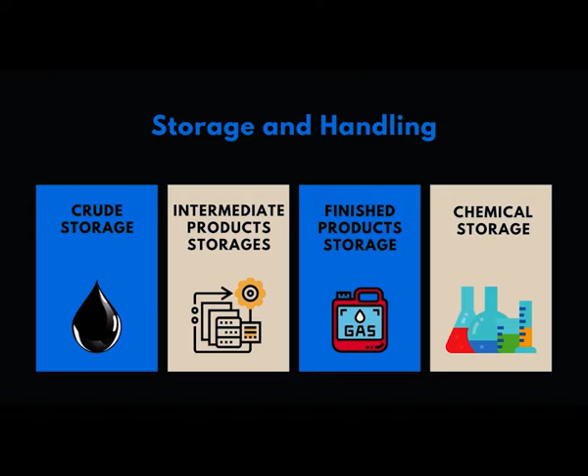Whenever product is received in the storage tanks, the level will go up. Always the hydrocarbon vapor will be on the top of the liquid surface, and these hydrocarbon vapors go out, and then air will come in during the pumping in and pumping out operations. So, during the entire process, there is a small quantity of hydrocarbon going out as evaporation loss. This kind of tank is primarily meant for non-volatile products known as finished lube oil or fuel oil, primarily heavy oils. So, if I use a cone roof or fixed roof tank for a lighter hydrocarbon, there is always a possibility of the vapors going out continuously and there is a huge evaporation loss.

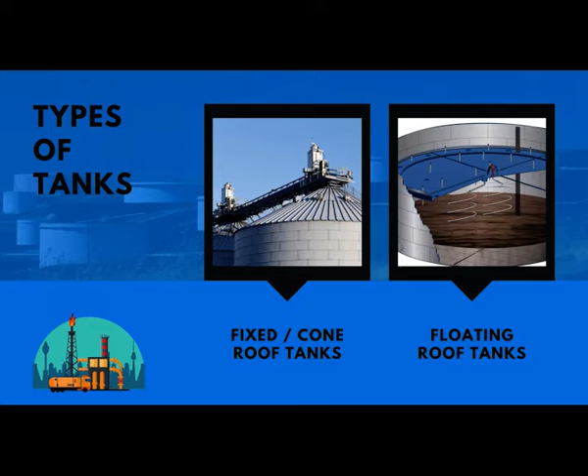In order to address the evaporation loss, designers have come out with another type of tank known as floating roof tank. In the floating roof tank, the roof is floating on the surface of the liquid and it is not tightly fixed or welded with the tank shell. So, the roof can float up whenever the liquid level goes up, and the roof can come down whenever the liquid level comes down. So, this way there is no gap between the roof surface and the liquid surface, and this is how evaporation is minimized.

So, floating roof tanks are primarily used for storing naphtha, heavy naphtha, kerosene, aviation turbine fuel, diesel, etc. These kind of light products which are evaporative in nature can be stored in floating roof tank.

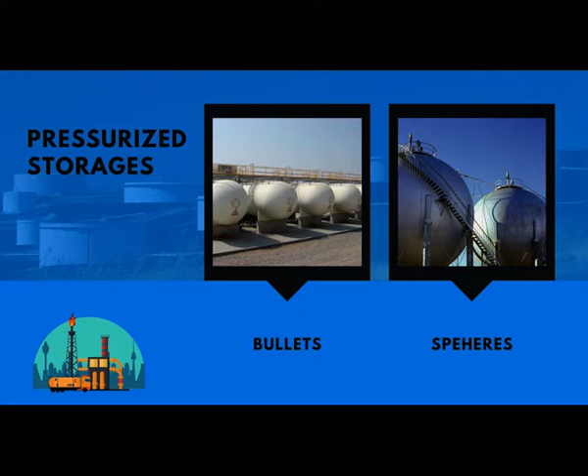Then we have other types of storage which are known as pressurized storages. For example, if you take LPG as a product from refinery, LPG is actually a gas, it is liquefied, and it is liquefied under pressure. So, if I have to store this LPG, I cannot store it in a normal tank, I have to store it in a pressurized container. That is where we try to use a bullet or a sphere. A bullet is almost like a capsule kind of structure, whereas a sphere is spherical in shape. Because of the geometry of this kind of tank, it can withstand pressure from all directions. So, these are all a little costly to construct and maintain, but we have no other option to store products like LPG, butylene, propylene kind of products.

Then what are the different kinds of activities that happen in a tank in a refinery? For example, if you take crude oil, the crude oil can be received in the tank, so the receipt is one kind of activity. Suppose if it is an intermediate storage tank, the intermediate products are received from the processing unit, or a tank can be meant for finished products, the finished products are received. So receipt is one function.

Then certain tanks, we have to remove water. If it is a product, water cannot be taken to market, so the water needs to be settled down and then drained. If it is a crude tank, again water needs to be settled down and then drained, because water cannot be pumped into the distillation unit. So water removal or preparation of the tank is another activity.

Then the third set of activity that can happen in a tank is blending. For example, you may have a diesel which would be a mixture of raw diesel, kerosene and heavy naphtha. All this can happen through a pipeline. If it is happening in a pipeline, then it is known as pipeline blending. If it is happening in a tank, it is tank blending. So blending can be another activity.

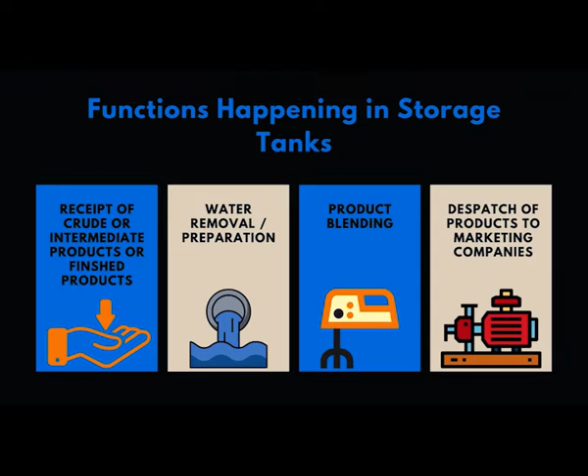Now let's try to understand power and utilities. Power and utilities will be a separate department in a refinery. Of course, it is part of operations, but it is not part of the manufacturing block.

Under utilities, we have water treatment plant, steam generation, cooling water system, process water system, service water system, power generation, instrument air system, plant air system, inert gas or nitrogen system, and finally fuel system. These are all the different kinds of utilities provided in a refinery.

Primarily, utility is nothing but an essential commodity or essential system without which the refinery cannot function. So it is imperative that we need to know more about the offsite and utility, because they are vital for running a refinery without any interruption.

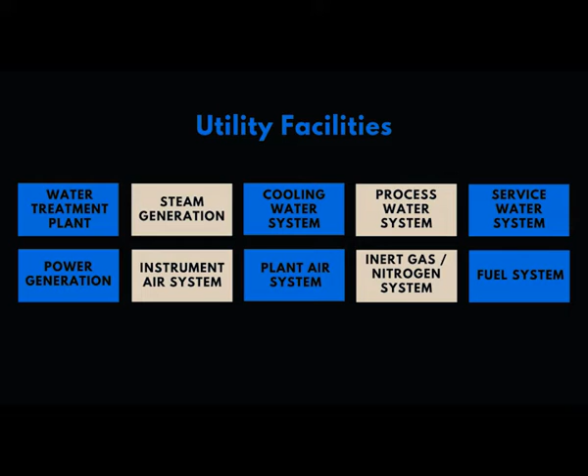Water treatment plant: water is an essential commodity to run a refinery. The sources for the water would be either groundwater, river water, or sea water, or city sewage water, or a combination of all this.

Here the water needs to be sampled and analyzed for its hardness content or softness content, and it has to be analyzed for all other composition. Based on that, the treatment will be decided.

The treatment plant will be designed upfront based on the raw water quality. Primarily here we try to soften the water, because hard water will form scaling inside the refinery equipment. It has to be softened, and it has to be deaerated.

All the dissolved gases from the water need to be removed. It can be either oxygen or carbon dioxide. Then finally you have to remove all the minerals.

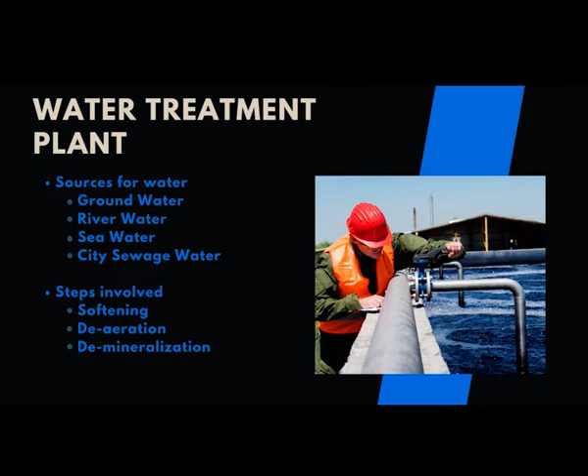This is very much essential to produce steam in a boiler. In order to produce steam in a boiler, we have to have demineralized water. So removing the minerals using ion exchange is one step in the water treatment plant. This is an essential step in refinery utilities.

Then steam generation. Why do we need steam? Steam is meant for multiple purposes. One is, even in process in a refinery, like the steam reformer, you need the process steam. The process steam will be part of your process.

So here are the steam and hydrocarbons in a reformer. They undergo chemical reaction, and finally hydrogen is produced.

Then steam is also used in steam turbines to produce power. Sometimes steam is also used as a turbine for driving different kinds of pumps.

What are the steps involved at a high level? The heating of the demineralized water happens in the boiler coil by burning fuel oil or fuel gas, and the steam is generated, and then segregated into different stages. For example, based on pressure, the steam can be categorized into high pressure steam, medium pressure steam, or low pressure steam.

The next one is known as the cooling water system. In one of the previous episodes we discussed how crude oil is preheated before getting into the furnace. So crude oil is preheated with the help of hot products.

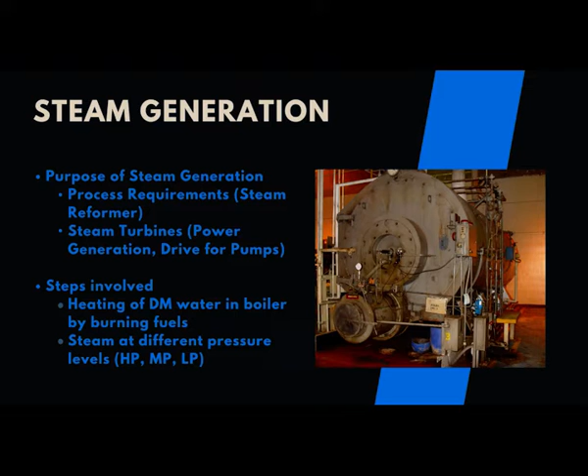So this is the kind of heat exchange happening. Apart from these heat exchangers, finally there will also be product coolers. The product coolers will ensure that the products reach ambient temperature before they are sent into storage.

How are these products getting cooled? They are cooled in a water cooled exchanger. So what would happen to the temperature of the cooling water? The temperature of the cooling water will go up.

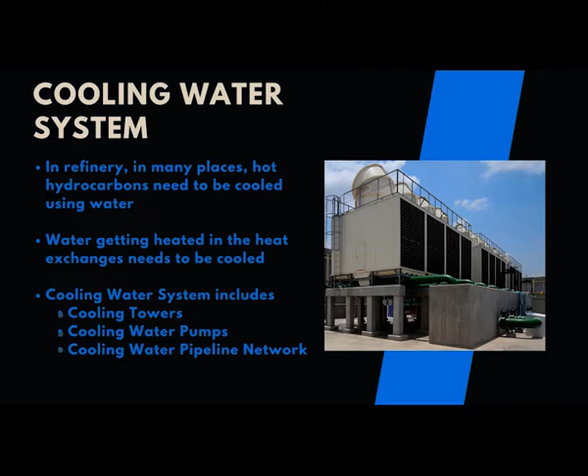So the hot cooling water coming back to the power and utilities department now has to be cooled. The quantum of cooling water coming back to the cooling section will be enormous. So in order to cool that, we have a huge arrangement known as the cooling water system.

In many places, hydrocarbons need to be cooled using water, and the water getting heated in the heat exchangers needs to be cooled, and this is happening in the cooling tower or cooling water system.

So the cooling water system primarily consists of a cooling tower, and it can have multiple towers based on the load and throughput. Then we have huge water pumps which will pump the cooling water to the entire refinery, to all the coolers, and then again they will come back to the system through the cooling water pipeline network. So all this will be part of the cooling water system.

Then we have process water. There are places where water needs to be injected at different stages of petroleum refining.

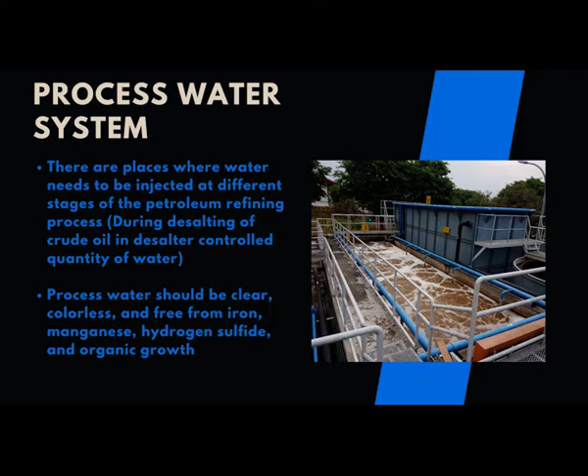Before admitting crude oil into the atmospheric distillation column, salt present in the crude oil needs to be removed. A controlled quantity of water is added and sent to a vessel known as a desalter, where the water is allowed to settle down. For admitting such water into the process system, we need process water, which should be clear, colorless, and free from iron, manganese, hydrogen sulfide, and other organic growth causing substances. That is known as the process water system.

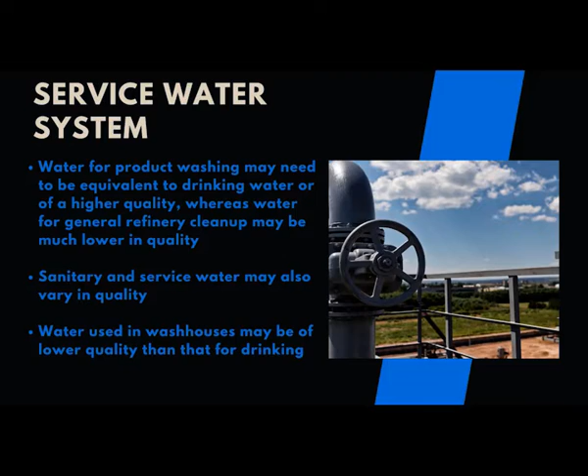Then we have another type of water system known as service water system. Inside a refinery, a lot of maintenance activities happen, and during that process the entire flooring gets spilled with oil and water, which need to be washed. For all washing purposes we need service water. Water for product washing may need to be equivalent to drinking water or higher quality, whereas water for general refinery cleanup may be much lower in quality. It is primarily meant for service purposes, cleaning and housekeeping activities. Sanitary and service water may also vary in quality - water used in washhouses may be of lower quality than for drinking purposes, which is known as potable water.

Power generation is an important activity in a refinery, because there are lot of rotating equipments that may require electrical power supply. Since a refinery is a continuous process unit which runs 24/7, 365 days a year, almost for 3 to 4 years until turnaround maintenance, the power supply needs to be very reliable. So refineries generally do not rely on external power supply. In order to have a reliable system, they have a captive power generation unit inside the refinery.

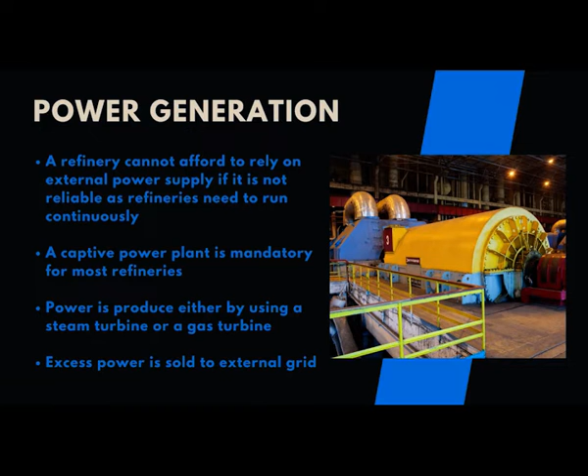We mentioned the need for a steam generation facility. With the help of the steam generated, we can run a turbine, and with the help of the turbine we can produce power. A refinery cannot afford to rely on external power supply if it is not reliable, as refineries need to run continuously. A captive power plant is mandatory for most refineries. Power is produced either by running a steam turbine or a gas turbine. Excess power, if generated, can be sold to the external grid. Normally the refinery floats with the external grid, meaning they will be selling power, but in case of an emergency they can start consuming power from the grid.

Then instrument air system. In a refinery you have a lot of instrumentation, ranging from sensors, dial gauges, etc. But finally all these instruments are meant for regulating the flow of some process stream, fuel or steam, etc. To regulate this process stream you need a control valve, and to regulate the control valve we need an instrument air system. So though all instruments are operated by electronic signal, the final control elements, the control valves, generally operate by pneumatic air. To supply pneumatic air to the control valve, we need a centralized facility known as the instrument air system.

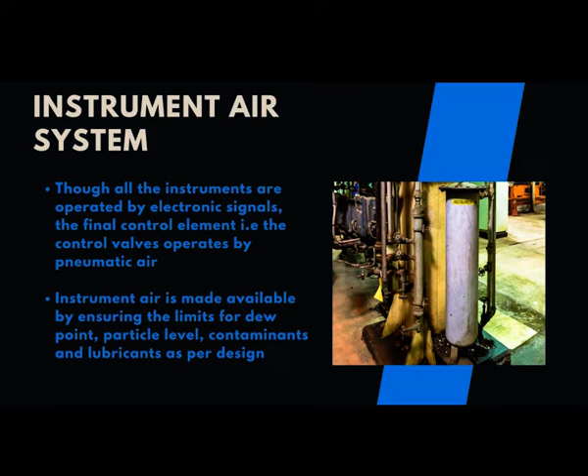The instrument air is made available by ensuring the limits for dew point, particle level, contaminants and lubricants as per design. This instrument air is generated and then sent throughout the refinery in the instrument air network, and this network should be maintained with proper pressure.

Then we have the plant air system. In the previous episode we mentioned bitumen air blowing, where we need air as a process stream. That is why we have a compressed air system, or plant air system. There are certain plants in a refinery where air is used as a process stream, and this air shall be void of moisture and any other impurities, because it is directly mixing along with the hydrocarbons.

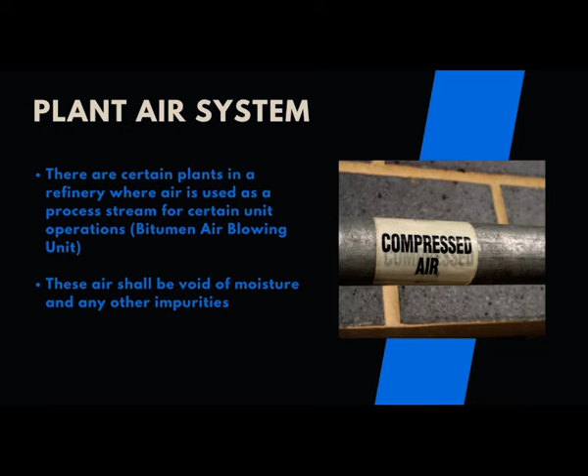Then we have the inert gas system. The purpose of the inert gas system is to test every segment of the refinery before startup. After a turnaround maintenance, a refinery has to be started at that point. When we start pressurizing the entire system, there should not be any pressure leak, and the hydrocarbon should not come out and create a safety hazard. In order to take care of these issues, we test the entire system with the help of inert gas. In a refinery, nitrogen is primarily used as the inert gas.

Nitrogen as inert gas may be needed for pressure testing of vessels and the system in the refinery. It is also used during startup of process plants, and nitrogen is produced by splitting air into oxygen and nitrogen, either by pressure swing absorption or cryogenic methods.

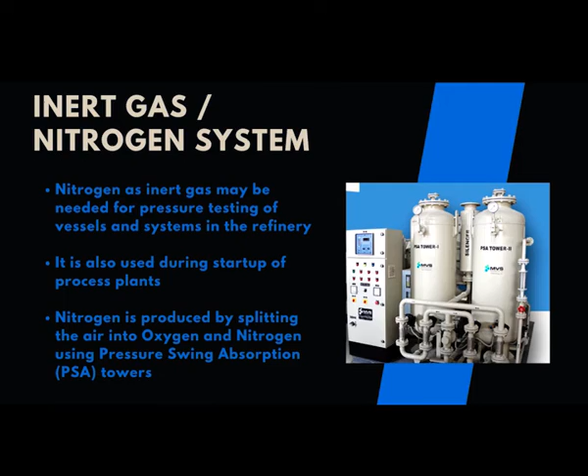Then we have the fuel system. There are many process heaters or furnaces inside a refinery, starting from heating crude oil. There are multiple segments of the units where the temperature of the process stream needs to be increased.

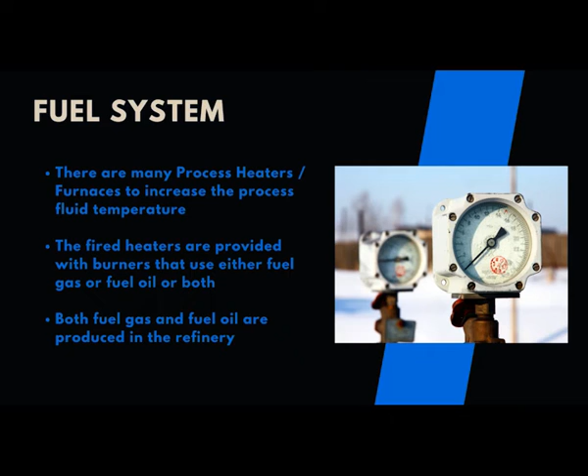This can be done by burning fuel gas or fuel oil, which are already produced in the refinery, but we need a system to regulate their flow, pressure, etc. Fuel gas comes through a fuel gas header. Similarly, fuel oil has a supply header as well as a return header. If fuel oil is not congealed, the line should not get choked, which is why we have a fuel oil return header going back to the fuel oil storage tank, so there is continuous movement and no possibility of the line getting choked.

Then we have certain systems which are very much essential from the point of view of health, safety and environment. One such system is the flare system, then the fire water system, then the effluent water system. Let's quickly try to understand all three systems.

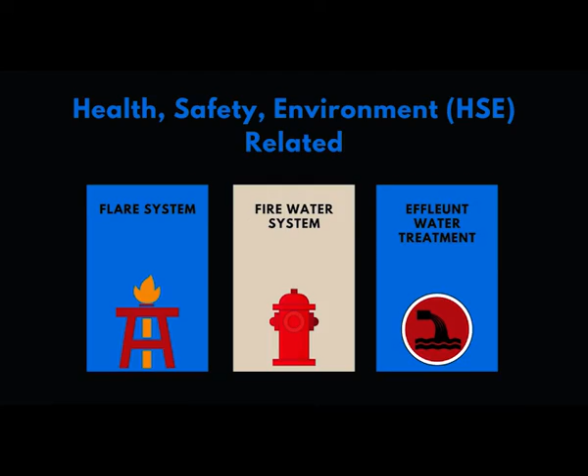In every refinery, from a distance you will be able to find out the presence of a refinery, or even sometimes whether the refinery is running or not. When a refinery is alive, it can be significantly seen with the help of a flame in the flare stack. A flare stack is nothing but a tall tower above which waste gases from the units are burnt safely. If they are not burnt safely, the hydrocarbon will settle down at ground level and create a potential safety hazard. So in order to avoid this, these gases are burnt.

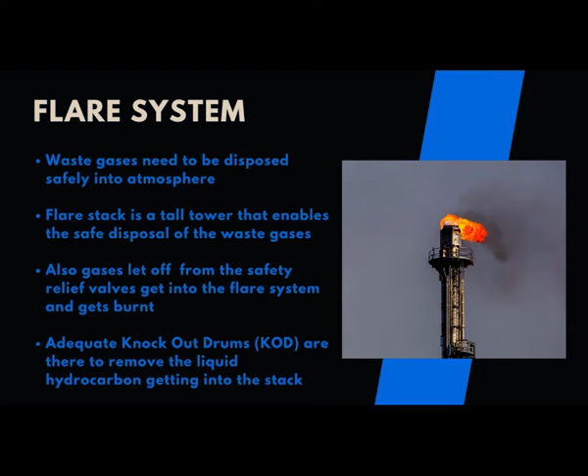Today we have a lot of sophisticated systems to compress the flare gas and recover energy from it, known as a flare gas recovery system. But there will still be a lot of uncontrolled gases coming out of the refinery. These are all collected, and any liquid hydrocarbons present are settled and separated, and finally the gases alone are burnt on top of the flare stack.

Then we have the fire water system. Even in commercial buildings you would have seen the fire water header and the fire water network. In a refinery, since a lot of hydrocarbons are flammable or sometimes explosive in nature, we need an exhaustive fire water system.

The fire water system primarily consists of a fire water pond. Most of the time treated water is stored as the fire water pond. We need high capacity fire water pumps, and different peripherals like hydrants, turrets and nozzles, so that at any point of time the water can be properly focused and targeted on the place where the fire is happening.

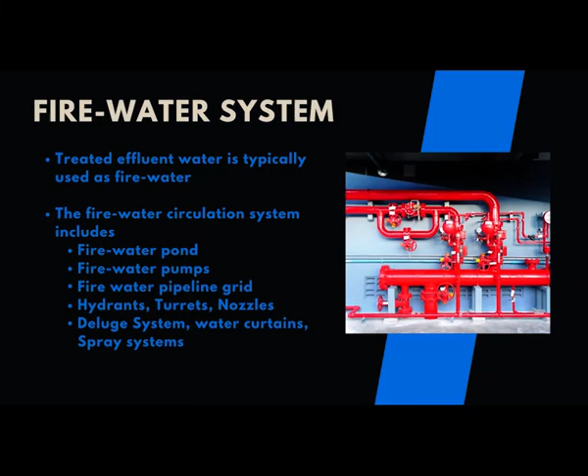Then we have certain other systems known as deluge systems, water curtains, spray systems, etc. Without taking much time, by blowing a seal, if there is suddenly a fire in a vulnerable area, the water should immediately form as a curtain or a shower. These kinds of safety mechanisms, pipeline networks along with interlock logics, are made available as the fire water system.

Then we have the effluent water system. Refineries generate a lot of effluent. Whenever a vessel is opened for maintenance, the content is drained, or when a floor wash is happening, all the water and oil particles get accumulated in the sewer basin. From the sewer basin, the oil is allowed to float on top, and finally it is pumped off and circulated back into the system.

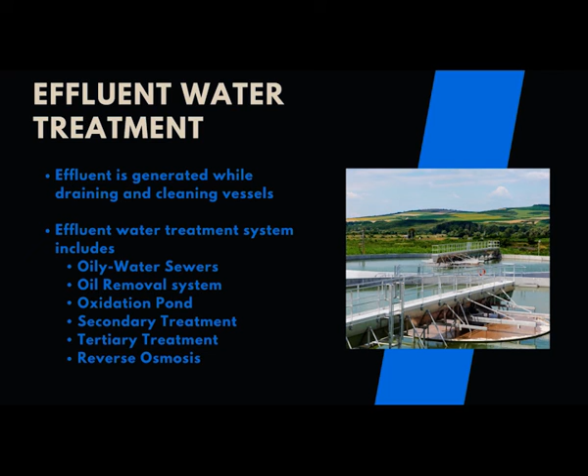The rest of the water from the sewer basin goes to a treatment plant where you have primary, secondary and tertiary treatment. After treatment with chemicals, some refineries also employ a reverse osmosis plant. With a reverse osmosis plant, you can recover as much water as possible and circulate it back, so internally you can manage your water requirements and drastically reduce water consumption. These are all part of the refinery water treatment system.

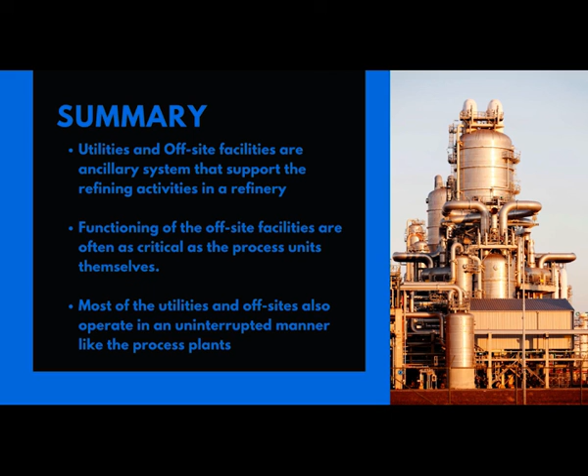Today, in the offsite and utilities segment, we have seen the categories and different types of systems that are part of offsite and utilities. The functioning of offsite facilities is often as critical as the process units, operating on a 24/7 basis in an uninterrupted manner like the process plants. At a high level, we discussed the offsite facilities and utilities essential for smooth operation of the refinery. Every engineer who would like to know more about refining must know about offsites and utilities.